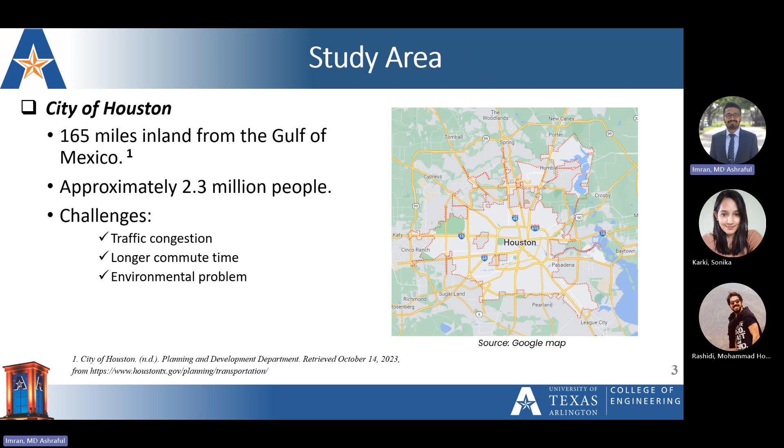Therefore, we are facing a lot of challenges in the city of Houston. The first and foremost problems, like as usual in other cities, are traffic congestion, longer commute times, and the environmental problem is also increasing day by day because of the car-centric focus of the city.

Next, we collected data about land use, socio-demographics, socio-economics, and transportation characteristics from OpenStreetMap and the American Community Survey. So the left map shows the land use pattern of the city.

Low density development is one of the main defining characteristics of the city of Houston. There are no zoning regulations as well because the city is large and there's a preference for single family homes, so the city is expanding to the suburbs. Here we can see mostly those yellow color boxes are residential parts, and they're expanding to the outskirts of the downtown as well.

On the right side, there are two maps showing the median age of the city of Houston people—the left one is for males and the right one is for females. Here we can see that mostly the age is below 50 for both males and females, up to the fourth quintile.

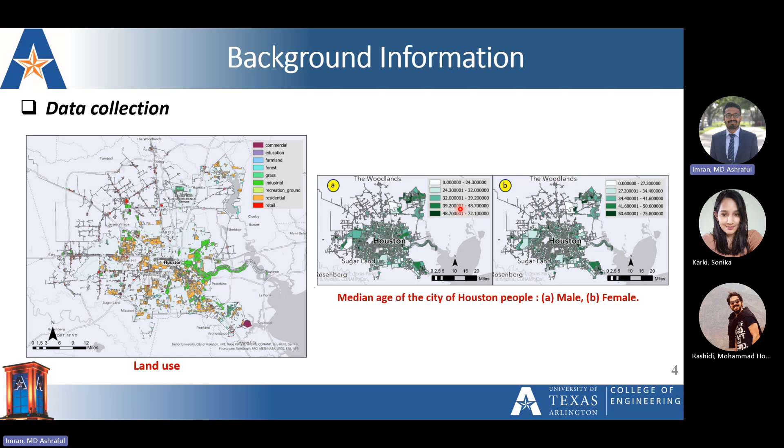Here we are talking about race. The top left part is showing white alone people, while the northeastern side has darker colors representing a higher number of white people. In the top right portion, those dark colors again are present in the northeast and southern part. There are also American Indian, Alaska Native alone, and Asian people in the city of Houston because it's a diverse city—a lot of different racial groups are living there.

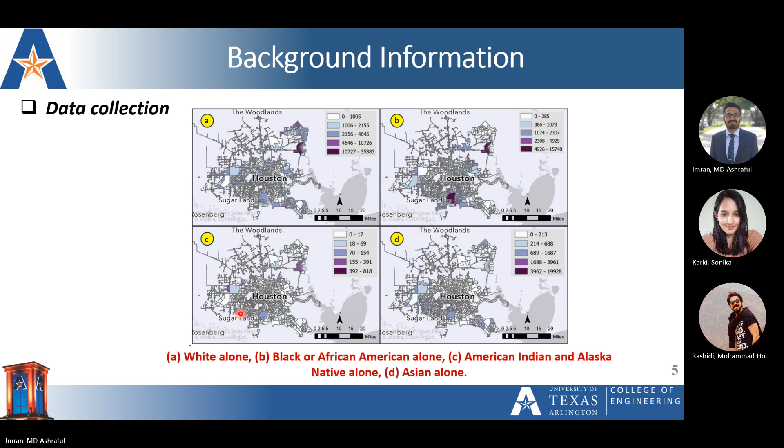We also have median household income of the city of Houston people in the left map. It ranges from very small income to very high income, up to 250K. Mostly in the northeastern side, in the Galveston regions, and also in the downtown part, there are high income people.

At last, we have transportation characteristics for the city, which is accessibility for transit, ranging from 0 to 1, where 0 means low access and 1 means high transit access. Here we can see that the central downtown has high access for transit for the city of Houston people, but in the northeastern side and the Galveston region, they have less access.

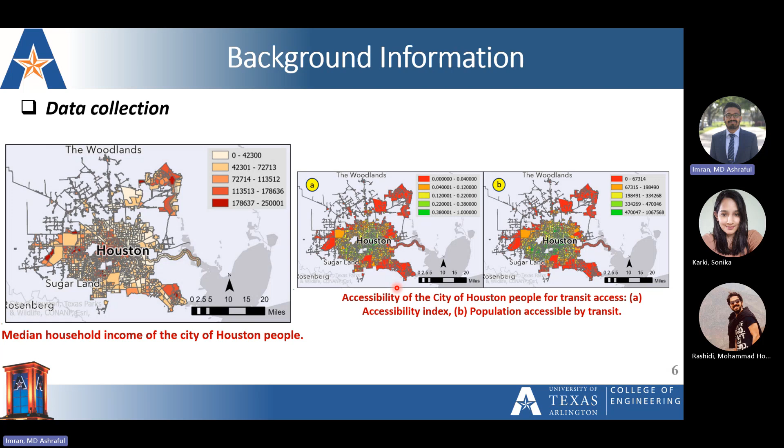So finally, considering this data and background information, we'll be talking about the transportation problems. There are three transportation problems we listed. The first one is the non-motorized problem called lack of sidewalks.

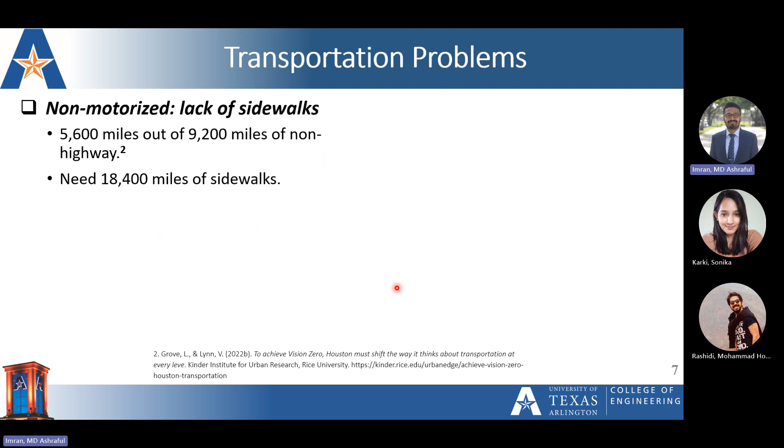There are actually 5,600 miles out of 9,200 miles of non-highway roads without sidewalks, and we need around 18,000 more miles of sidewalk. There is a figure from the result of a street assessment at Gulfton. Here we can see that the red lines represent no sidewalks, which represents a huge portion of the city streets. Considering these sidewalk problems, issues arise like pedestrian accidents, lack of accessibility, and reduced quality of life.

However, although the city is trying to assess and address those problems, there are challenges regarding limited funding and resistance from owners, because according to City of Houston policy, owners are responsible for the maintenance of sidewalks around them. Mostly there is also institutional and cultural inertia because of its car-centric focus.

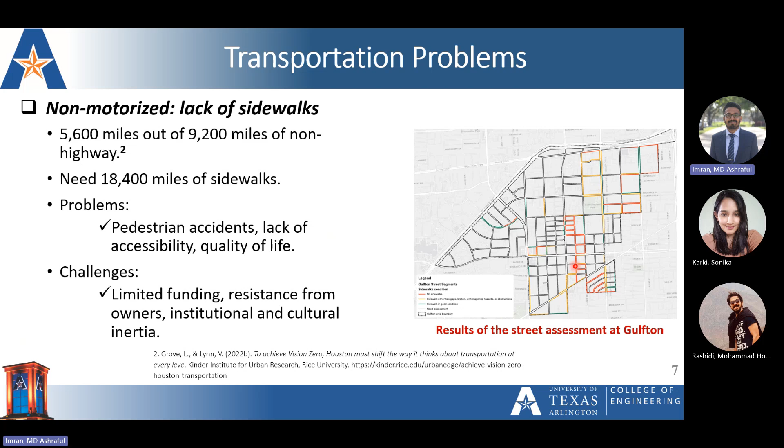Now let's talk about the motorized transportation problem. First, we talk about traffic congestion.

Traffic congestion in Houston has always been the major transportation problem, driven by rapid population growth. The causes include limited public transit, traffic accidents, population growth, and car-centric infrastructure compounding the issue, while ongoing transportation projects and the city's susceptibility to severe weather events add an unpredictable element. This also has economic impact, affects air quality, causes emergency response delays, and hinders traffic flow. Despite efforts to enhance public transportation, expand road capacity, and implement technology-driven solutions, the challenge persists, reflecting the complex dynamics of managing population growth in a sprawling urban landscape.

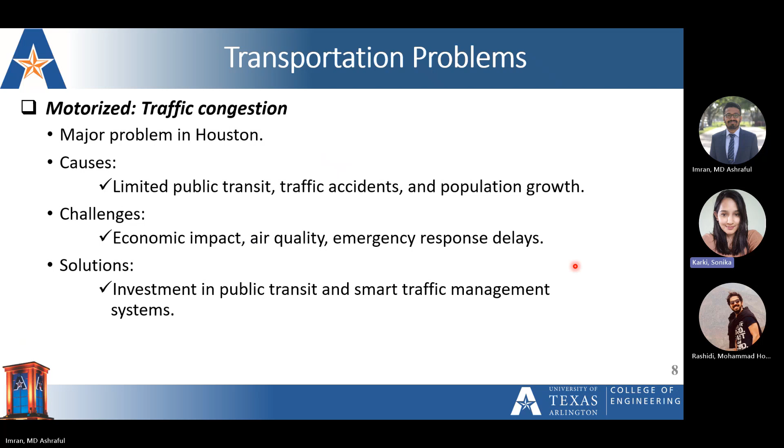The solutions might be investment in public transit and a smart traffic management system.

Now let's talk about future transportation. In future transportation, we have six mobility options, and the first one is electric vehicle.

Electric vehicles can be one of the sustainable options for future transportation, which is also energy efficient. Thanks to electric vehicles, which promise to transform the automotive industry with their zero emission battery technology breakthroughs and expanding charging infrastructure.

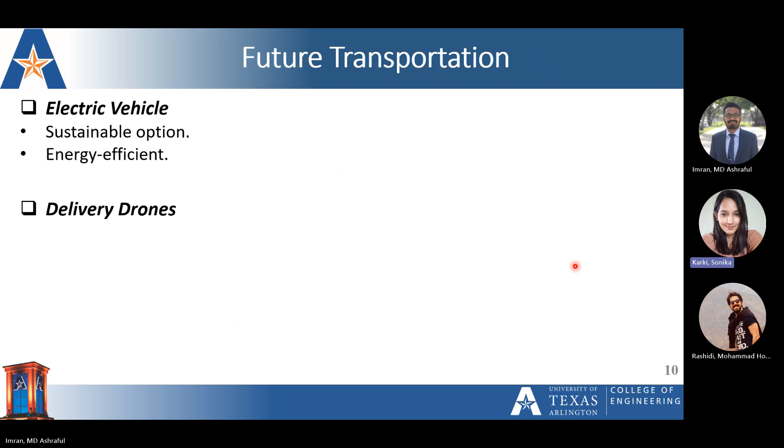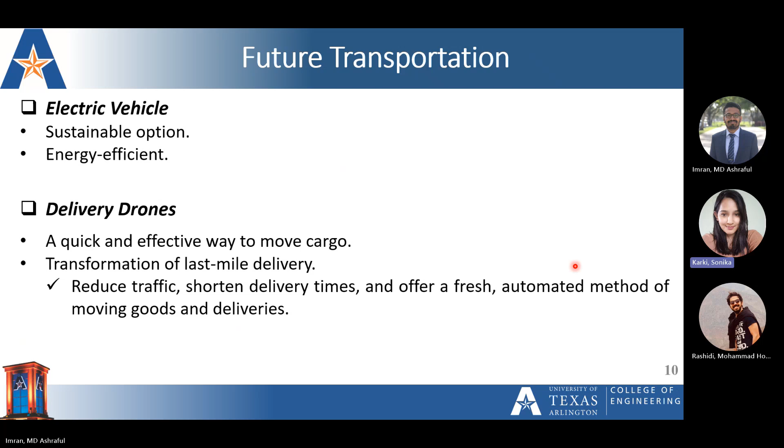Another option might be delivery drones, which are also one of the most expected future transportation methods, providing a quick and effective way to move cargo. This aerial vehicle could completely transform last mile delivery through technological improvement, reducing traffic, shortening delivery times, and offering a fresh automated method of moving goods and deliveries.

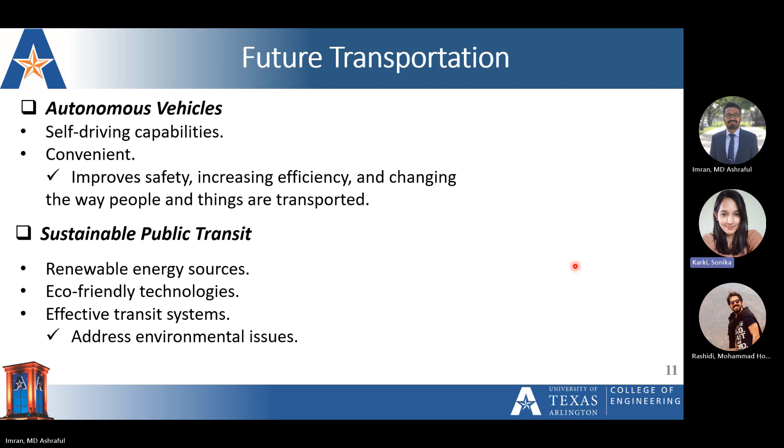The fourth one is sustainable public transit. The future of urban mobility is in sustainable public transportation, which uses renewable energy sources, eco-friendly technologies, and effective transit systems to address environmental issues, lower carbon emissions, and encourage more sustainable and inclusive modes of transportation.

Another one we have is the flying taxi, a cutting edge and future mode of transportation that travels around cities using vertical takeoff and landing capabilities. These aerial vehicles are propelled by electric motors and also reduce traffic on the ground, allowing effective point to point transit.

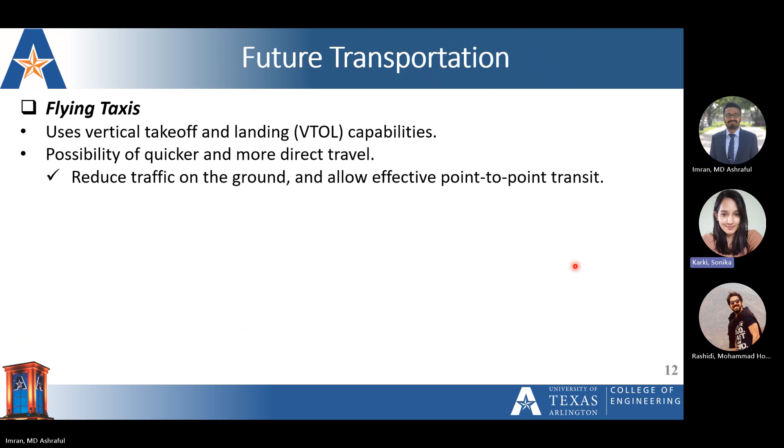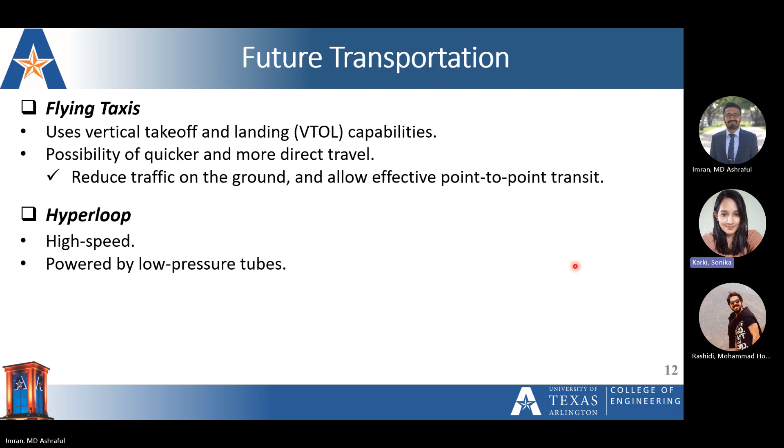And then the last one we have is a revolutionary future mode of transportation: the high speed Hyperloop concept. It is powered by low pressure tubes and designed to reach extremely high speeds, which will cut down on the amount of time it takes to travel between cities, and also promises lower environmental impact and increased efficiency. Therefore, Hyperloop offers a novel and revolutionary solution for long distance travel.

And now I'd like to ask Imran to continue with the rest of the presentation. Oh, sorry, Mohammed.

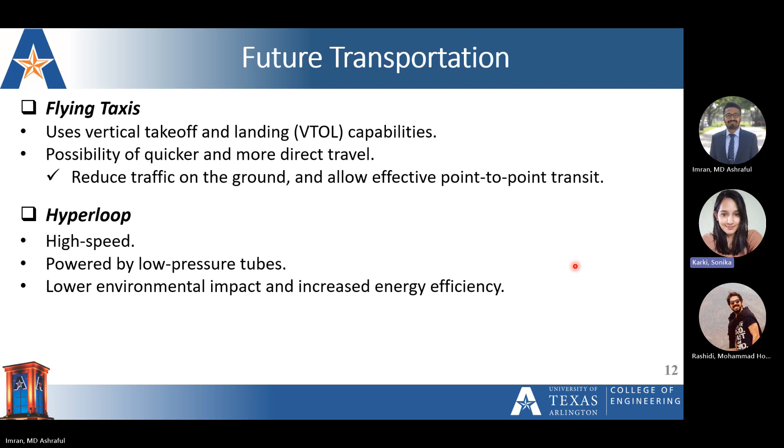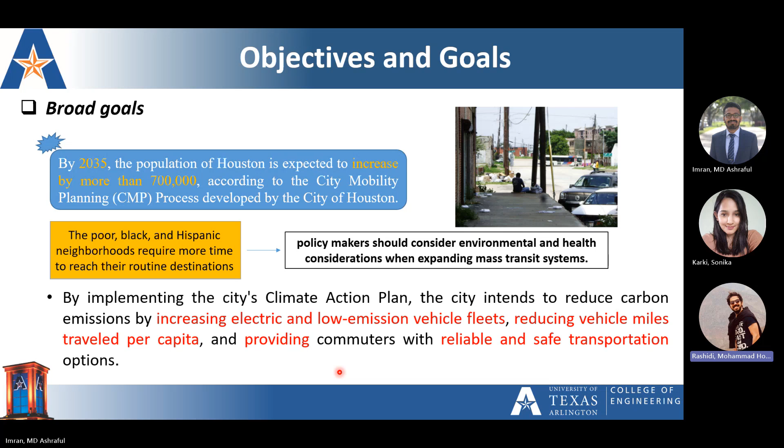But so far, by implementing the city's climate action plan, the city intends to reduce carbon emissions by increasing electric and low emission vehicle fleets, reducing vehicle miles traveled per capita, and providing commuters with reliable and safe transportation options. But our objectives

can be categorized into two approaches that we were discussing before.

For the motorized approaches, which had traffic congestion and lack of public transportation, we have the option of increasing the number of high occupancy or HOV lanes on major highways and implementing intelligent transportation systems, or ITS, which we're going to discuss later. These technologies can be used to collect traffic data, monitor traffic in real time, and connect people looking to carpool or rideshare.

And for the lack of public transportation, we can enhance the existing light rail system and increase the fleet arrival frequency, especially for buses. All of these options would help us reduce traffic congestion and improve air quality.

But for the non-motorized problem we have, which was the lack of safe and comfortable sidewalks for pedestrians, two options we have would be increasing the budget for sidewalk construction and maintenance, and expanding the number of bicycle lanes and pedestrian crossings, which will lead to enhancing pedestrian safety and encourage more people to walk and bike.

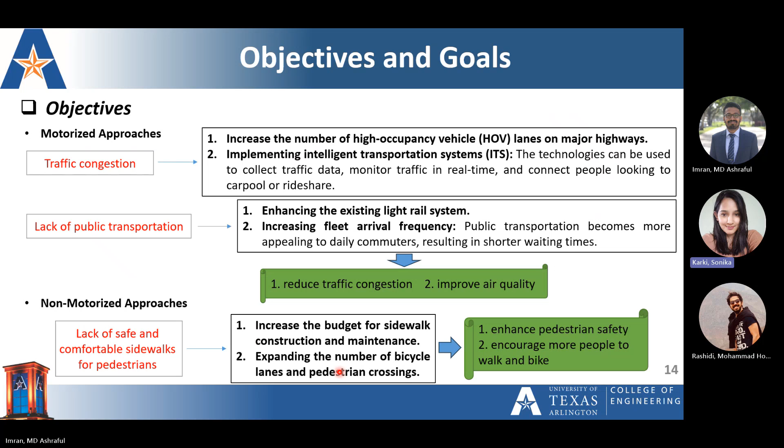Thank you, Mohammed. So this part of the presentation will be talking about the transportation solutions. Our first solution is intelligent transportation systems.

Mohammed already gave a brief overview about that, which we are providing from an operational perspective because it's a network of smart devices and sensors like CCTV cameras and other new signal technologies like adaptive traffic signals, also dynamic message signs. So the overarching goal is to reduce traffic congestion and improve travel time reliability.

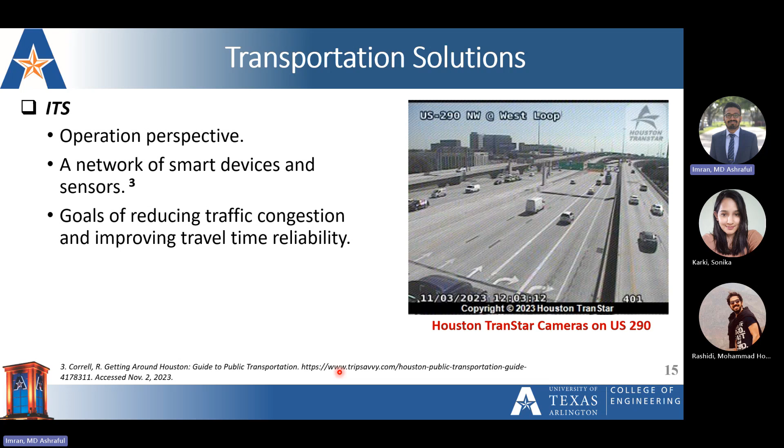Here we can see an implementation of cameras on US 290 in the Houston Transtar app.

We are recommending a plan for a smartphone app which will integrate with all of the ITS technologies, like information about the weather, about which route is closer, about parking, and everything when they will be heading out. This way they could minimize a lot of problems in terms of traffic congestion and improve their commute time.

However, there are a lot of challenges. Mostly it is costly and requires a lot of investment and resources. And because it's technology driven, there are a lot of issues in terms of bugs, security, and reliability. It also raises some ethical and social concerns because of data, so various cities are trying to propose data privacy opt-in and opt-out options.

Our next solution is dockless bikes and scooters, which is from the travel demand perspective because it is a shared vehicle that can be rented by users via smartphone, and it is a mode of active transportation which improves air quality. There has been a lot of research around the world showing it is a sustainable option in terms of reducing the number of trips and also reducing carbon dioxide emissions per day.

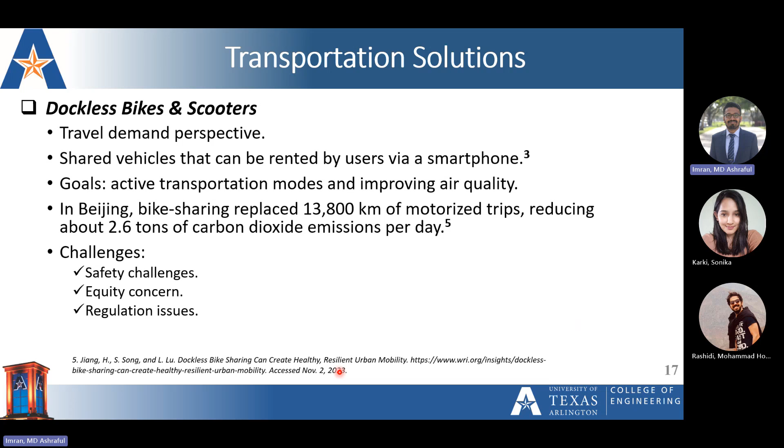And our final solution is the autonomous transit circulator, which is one of the futures we are heading toward. It is the solution from the travel behavior perspective, which is a system of autonomous vehicles that operate on dedicated lanes or tracks.

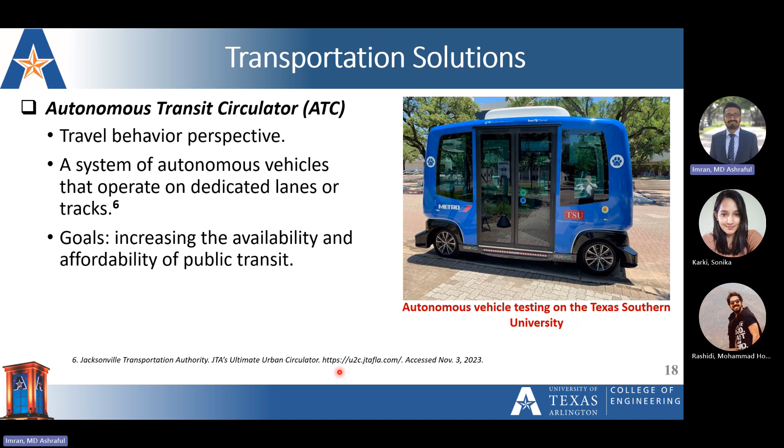The goal is to increase the availability and affordability of public transit, because Houston is more of a car-centric city, and people using public transportation and active transportation have been neglected by decision makers and planners.

So we are recommending that Houston could operate autonomous transit circulators by connecting some of the key areas and attractions in the city.

Also, they could accommodate the ATC by utilizing some of the current and planned structures, like overhead tracks, underground passages, or overpasses. Finally, they could also employ new structures like vertical landing and takeoff ports, or aerial terminals. So this is our solutions and our project.